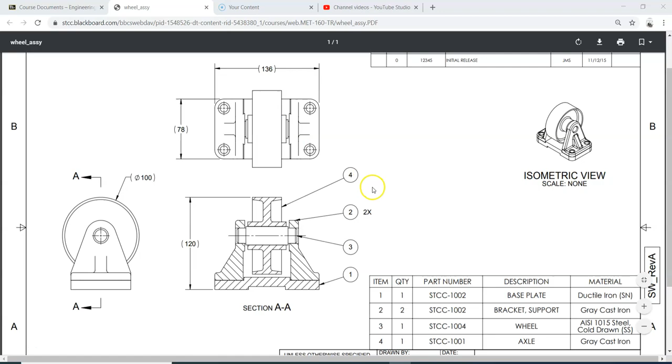First things first, we open up our SolidWorks. There are a few different ways to start an assembly, so I'm going to show you a few now. I'm going to go File, New, to make sure I'm using our templates, and I'm going to be using the assembly.

Just a side note, if you don't have our templates on your computer, those are available on Blackboard with a video underneath it on how to put those into your computer and how to tell SolidWorks where those are.

Okay, so back at this. I'm going to go into STCC metric assembly. And it will... let me delete that. I'll start a new one.

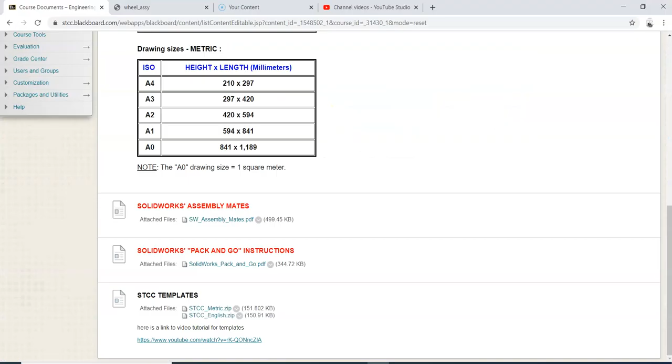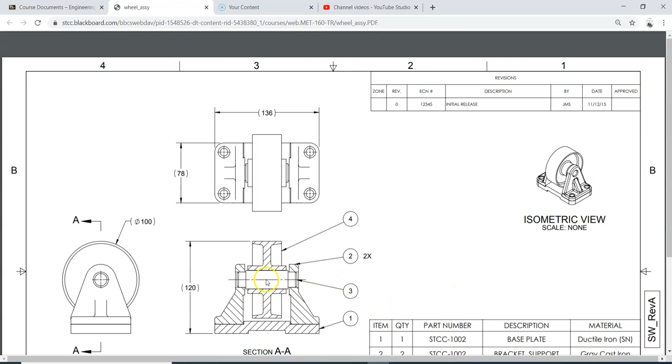First I have to decide what I want to start with. If you look at what we got, I like to model my assemblies on how I would build this, put this together in real life. Obviously you're going to have that base plate down first, and then you're going to have to bolt these in there, put that wheel in there, and slide that axle. Actually, no, our axle has those edges, so we'd have to put one in, and so on and so forth. Then the axle, then the other side, in the wheel.

So let's get back into it. I'm going to start with my base plate. I'm going to open that. Big thing here is if we click, watch what happens. So I clicked. Now look at our origin — it's out in space somewhere weird.

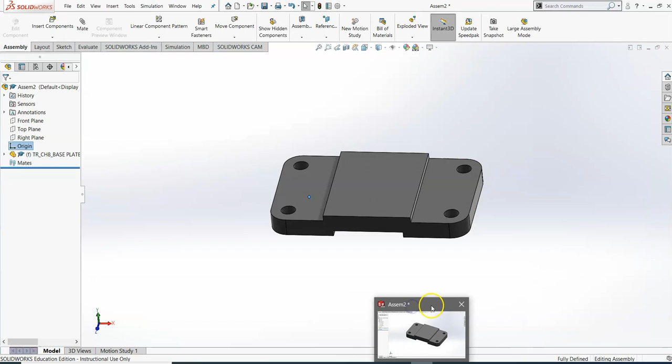So do not click when you first start your assembly. Don't save. We want to go File, New, again, assembly.

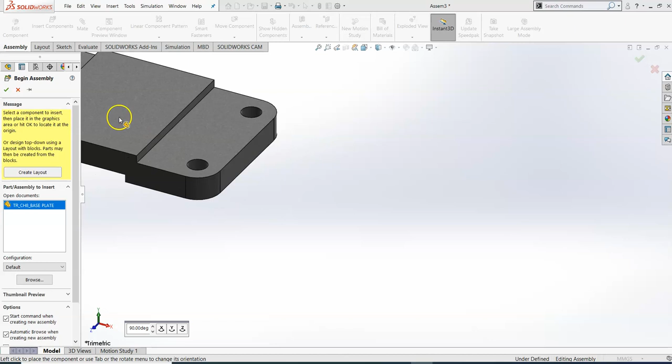Insert my components. If it doesn't automatically come up, just hit browse. Then go to our first model we want to start with, which is our base plate. Select open — so don't click, you want to just go over here and hit check. So what this does is it aligns your model's origin with the assembly's origin, and that's what we want.

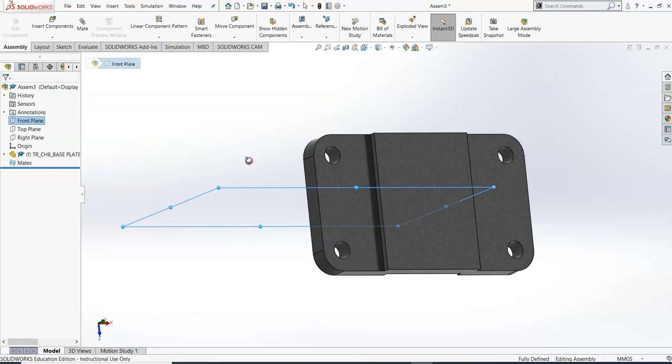Notice I'm fully defined here. This is locked in, I can't move that. My front plane is there, my top plane is my top, my right plane is my right. That's the main reason you want it — you want to bring in your origin with that.

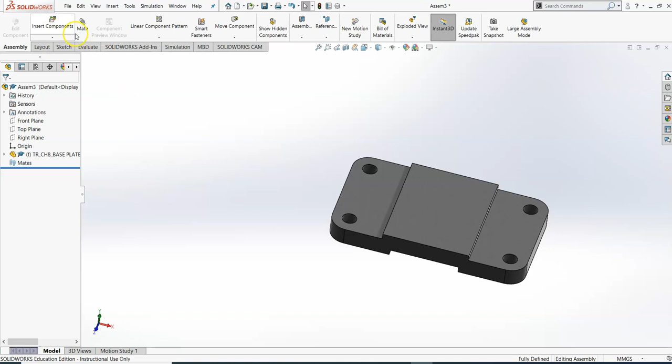So now we need to insert components. That's up here to the left — insert components. It usually pops up; if it doesn't, just hit browse. This is why it's really important to keep your files of those models all in the same folder.

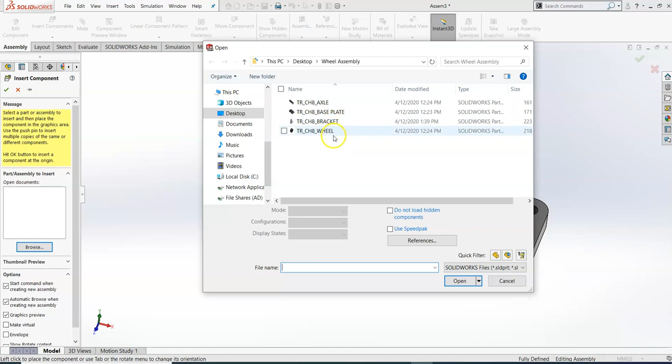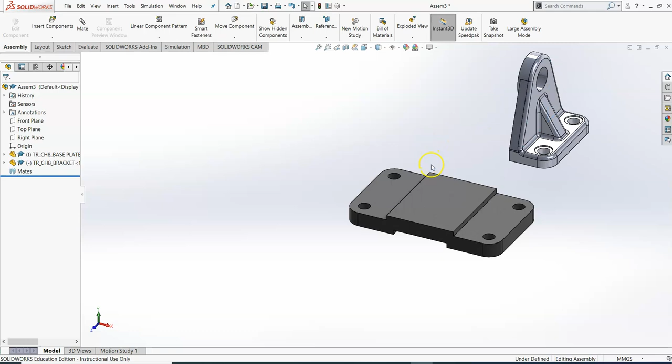Next I'd like to put in the bracket, and you can kind of just place that anywhere. Notice you can put it inside — SolidWorks doesn't really care where you do what you do with that, but notice I can move that anywhere I want.

Now we need to confine this. It's just like when we're sketching — we sketch something, we need to define where it is, right? So that is called a mate. Mate selections right here — this is what we want to mate.

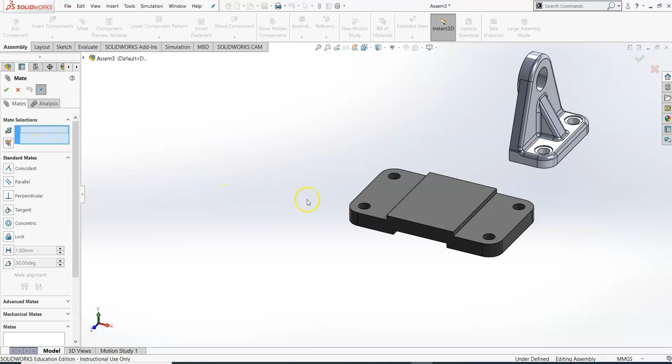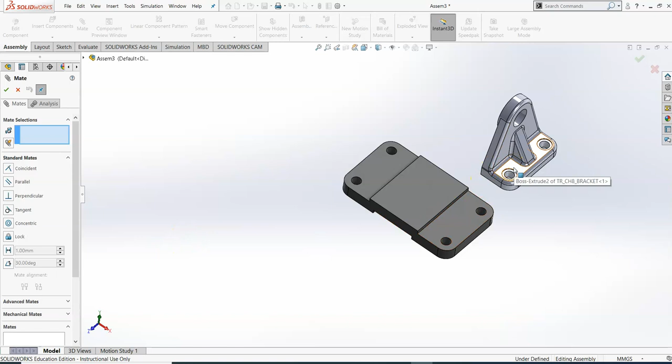If I look at my part, I know that these two holes have to be concentric, meaning circle inside a circle, not off to the side — they're both centered on each other. So I can select this, you can even select this to the bore, to that.

Okay, notice now, I can move it up and down. I can turn it side to side.

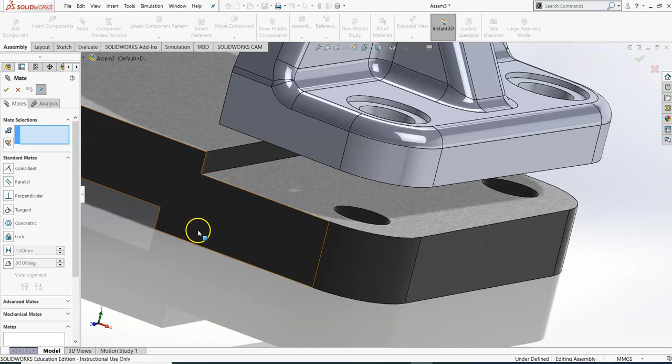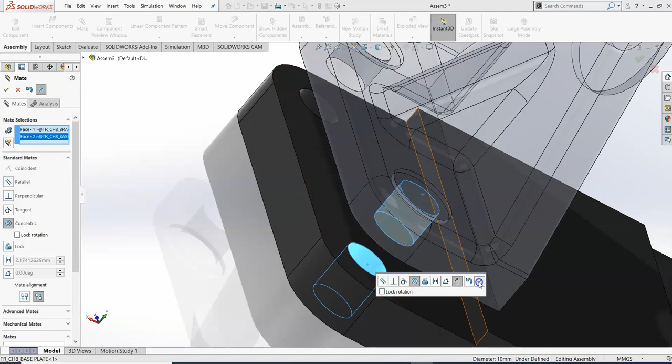Okay, so I need to add more mates. Notice I'm under defined too. It tells you that down here, just like in a sketch when you're sketching models. So if I do that hole to that hole, now I can't move that side to side. I can only move that up and down.

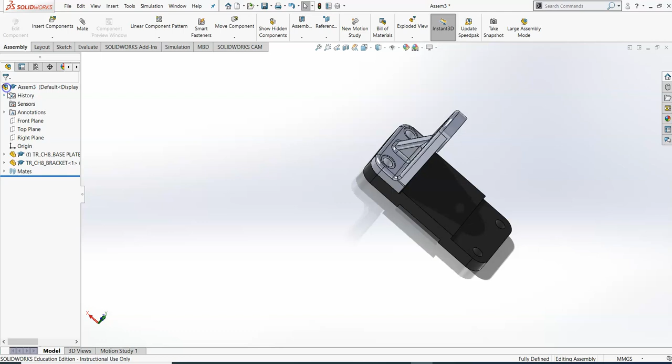So next, something that looks good would probably be this surface to this surface, and that's going to make those coincident. Now I hit OK. Notice what happened, I became fully defined. So if I get out of here, now I can't move this at all, right? You can't move it, nothing.

All right, so next I pretty much want to do that same thing over here. So again, insert components, grab another bracket, and just place that anywhere. You can click here once it's there, right? Notice I placed it, I can still turn it any way I want, up and down, side to side.

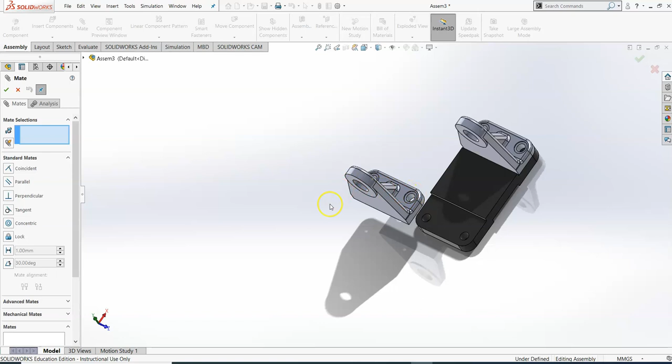So let's just mate that the same way we just mated that one. So we got, but notice now I got to turn this, right? So I don't want this hole with that hole. I want this hole with this one, right?

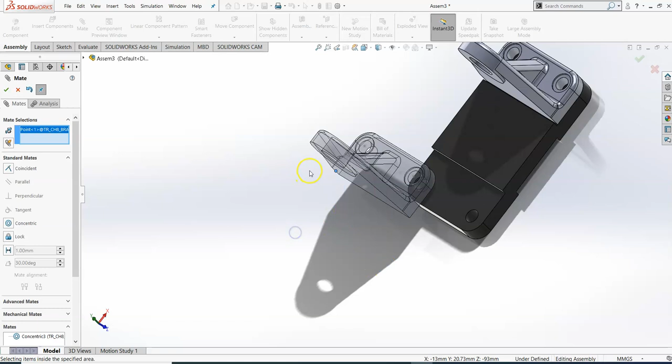Notice you don't want to click lock rotation. I still want to be able to move that how I want.

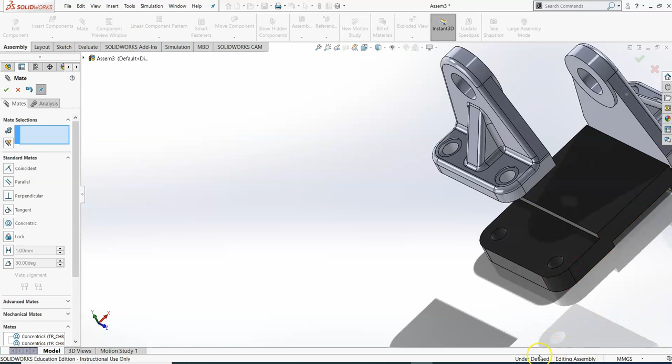So again, that hole and that one, and accept that. I'm still under defined. I gotta stop it from moving up and down. So now I can make that surface and that surface coincident, accept that, and bam, I'm fully defined.

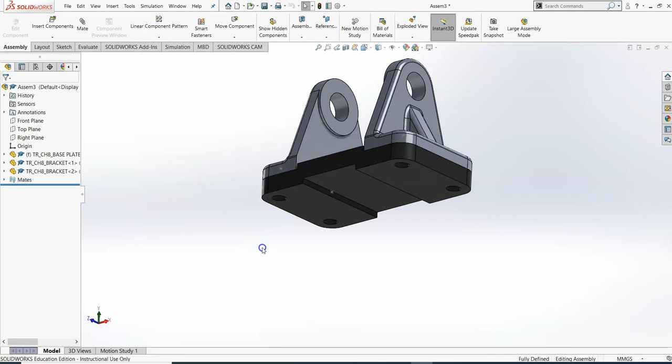So again, you can look at that isometrically, gives you a good view.

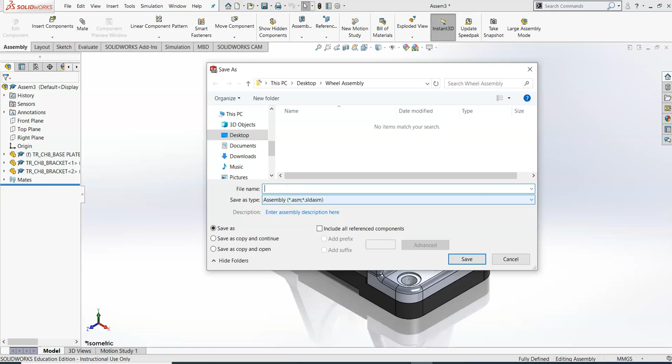Okay, so another thing I want to do is I want to save my work. I don't want to get too far ahead and lose all my work. So just file, save as, desktop wheel assembly. I can just name this wheel assembly, and of course, like always, put your initials with that.

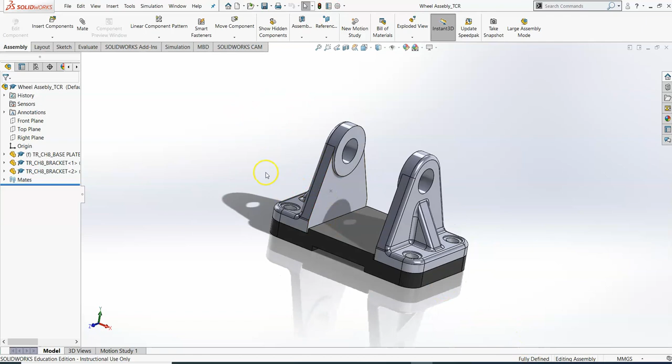All right, so again, fully defined. So let's add another component. So I have my axle, let's try putting that in there.

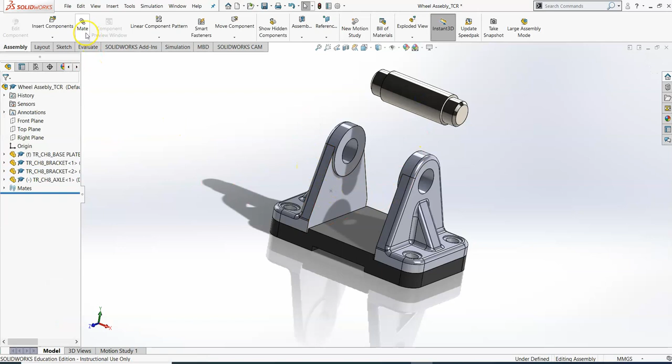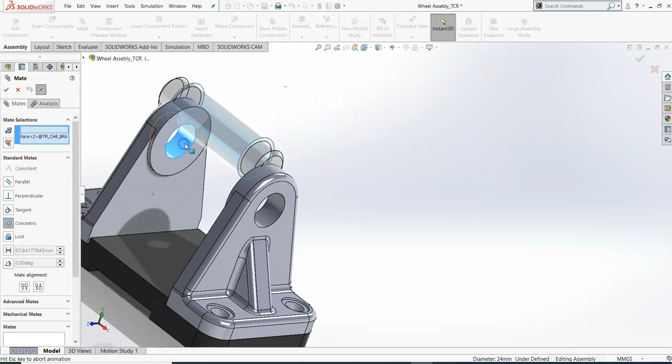And you can just place that anywhere really. So again, mates. So I need this, that surface. Really I could use any of those, because those are all concentric to each other. And you probably make it concentric there, right? So, all right, you can slide it in.

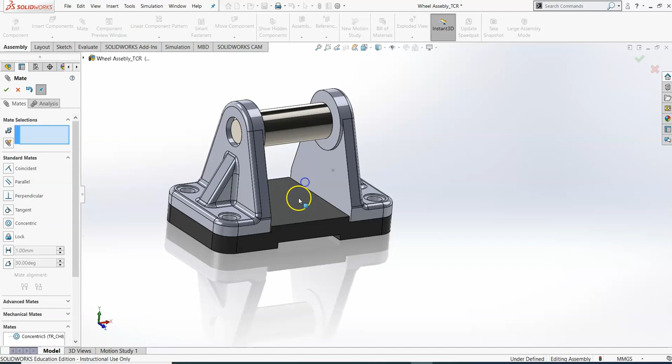If you look, you have clearance all around, right? So I can, you have all these different mates.

You have standard mates, these are much like your actual drawings when you're modeling. And you have advanced mates down here, width, symmetric. And lastly, you have your mechanical mates. We're not going to be getting too much into all of that, mostly just your standard mates.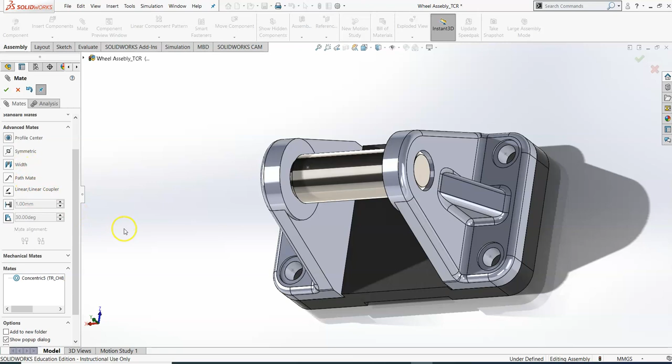Maybe some advanced ones here. So notice how this would be put together. This would really be locked in, right? So I wouldn't be able to just go through there, right? You just put it in like that, right? And it'd be able to move freely.

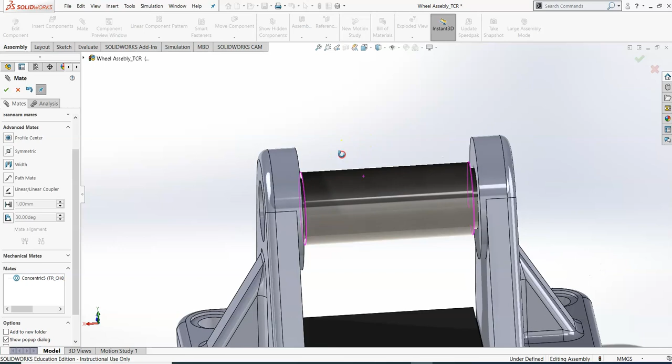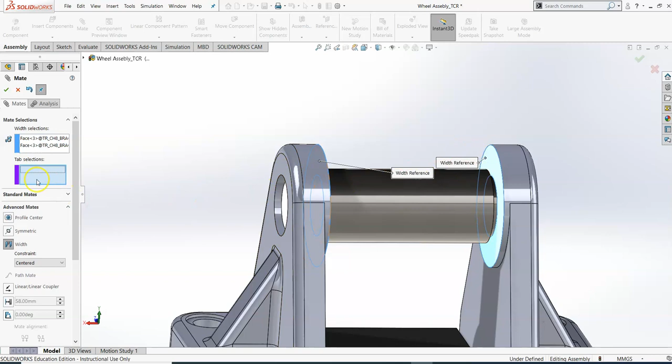I can put in a width if I would like, centered maybe. So let's do our selections. So we have this one and that one, and then we want, so we have our two surfaces there, then our tab selections. I don't know if that one will work. Really I want that face and that face.

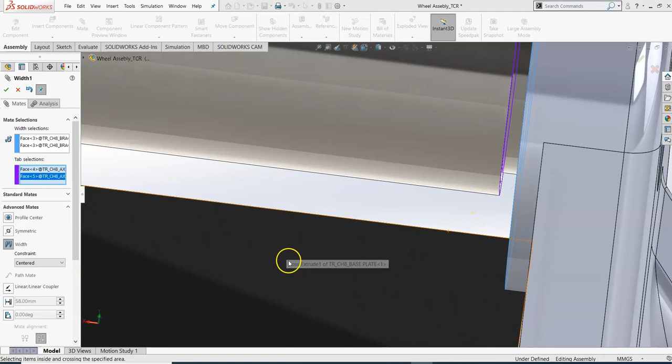So notice now it's, I have it locked in there, but that's just for my reference. So notice I can still spin it. You can kind of see it spinning if you look real good. That is why it's underdefined.

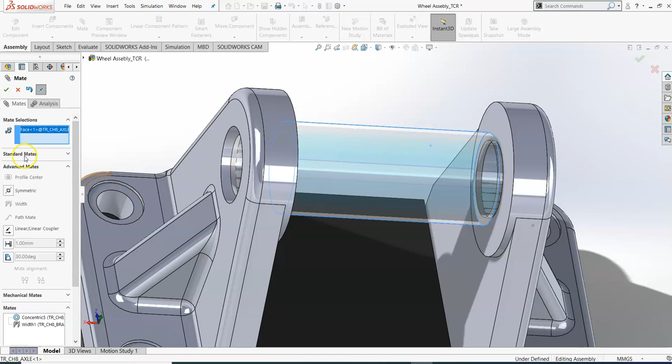So if I wanted to, I could go in there and I could lock my rotation and that would fully define me. So let's just do that.

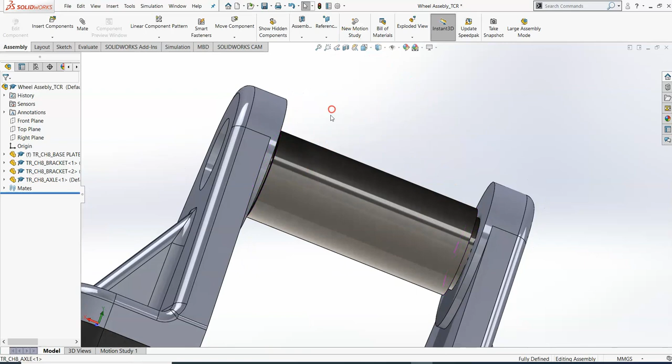And again, so I'm fully defined. Okay, I don't want to mess that up. I'm going to do a Control S to save my part.

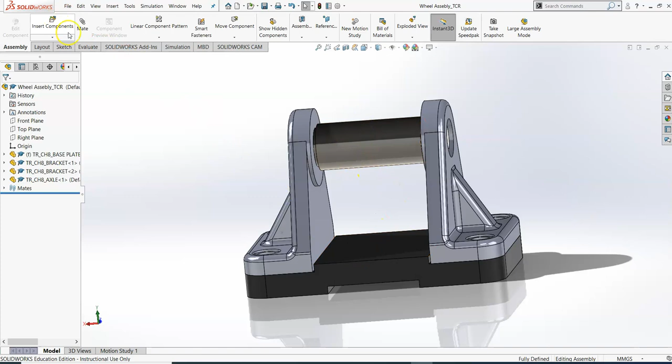Next, we need to add that wheel, right? So we need to insert the component first. So we have our wheel. We can just place that up there. And now our mates.

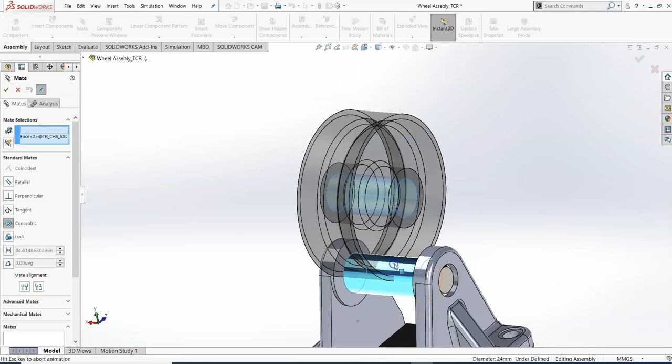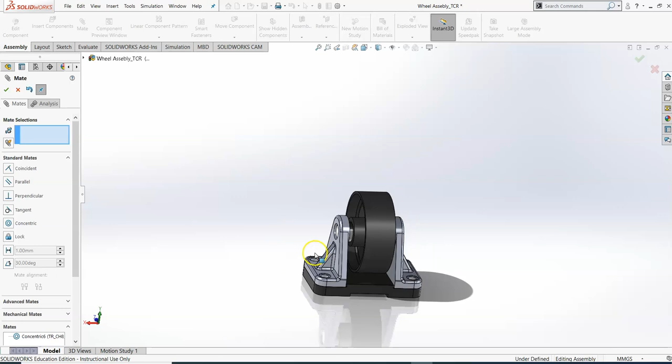We have that center and that, right? So we want those concentric, right? Notice that can still spin. In real life, if you were doing any analysis on these, simulations, you wouldn't really want to lock that down. But this way we have a good drawing.

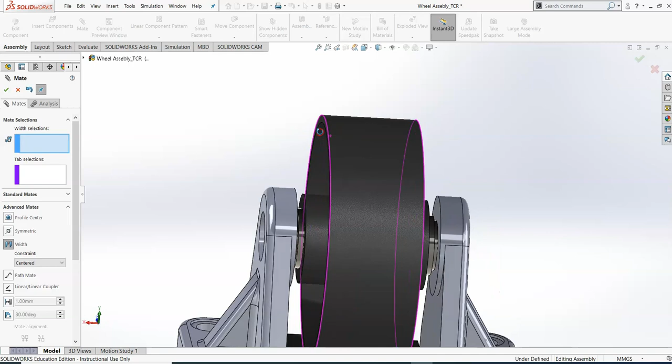I'm going to do another advanced mate there, and I'm going to do a width mate. Remember you have two selections here. Again, you want this one, that surface, and that surface. Your tab selections. Any two surfaces that are symmetrical on this, you could really use this part and this. Usually I like to do the closest two.

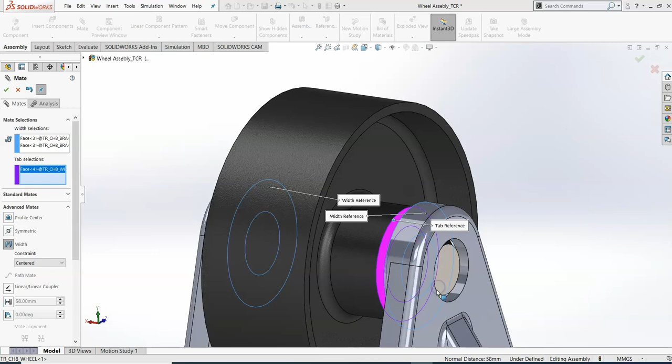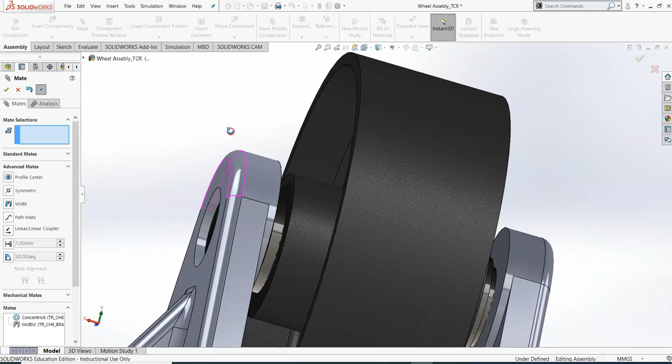Okay, now I have that locked in. So if you see, I'm under defined. That's because this wheel is left to be able to spin. For our drawing, it doesn't really matter. It's a revolved feature, so it's the same all around. But if you want to, you can go into your concentric mate and lock that rotation, hit accept, and now I'm fully defined again, right?

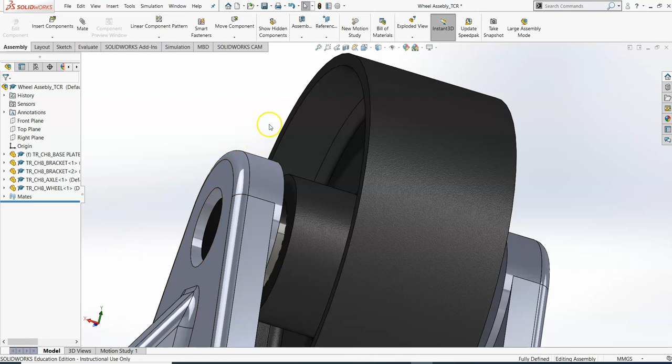So let me just pause this real quick. I gotta go and check something real quick. All right, sorry about that. I'm back. Okay.

Also, notice I do not have my bolts in there like I would in real life, right? I can add those. I will not be requiring that.

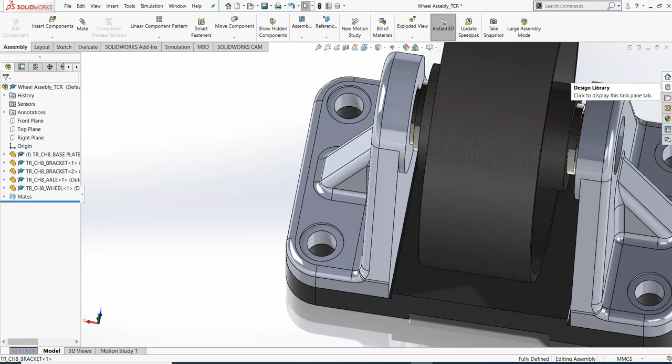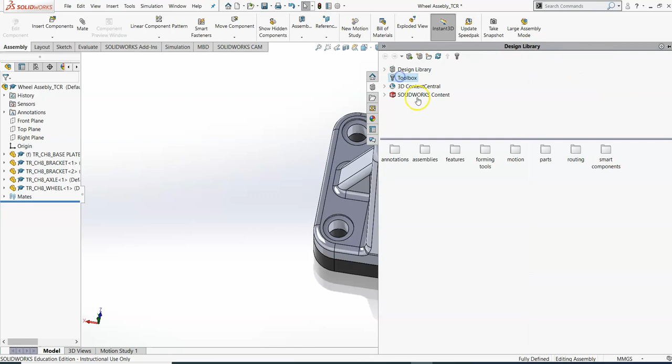Okay, so to do that, where is our toolbox? There it is. So you would go into toolbox. It's not even added in, so you can add that in. It'll download it from the internet. And then you have all these different ones, bolts and screws and O-rings and bearings and pretty much anything you could think of.

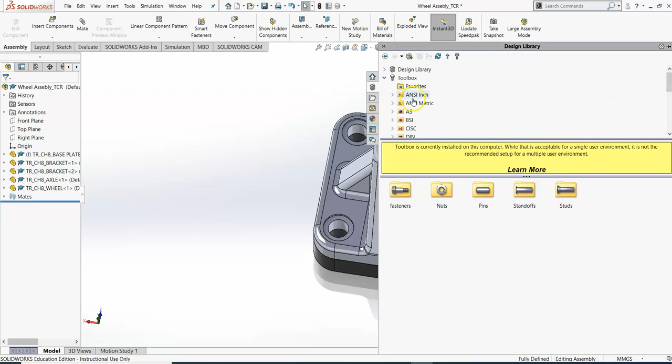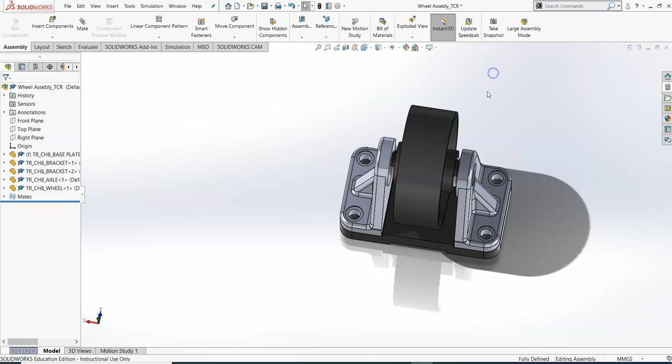A lot of your PEM nuts. You guys don't really probably know about PEM nuts, very commonly used in industry, but we're not making you do that for SolidWorks 1. You will have to get into that later on, but for now I'm just showing you where it is. So again, design library, toolbox, you'll probably have to download it, and you have all these different ones: ANSI inch, metric, I think that's Australian, British standard, Canadian, all these things. You can also make your own library and have it here, depending on what industry you are in, that comes in handy.

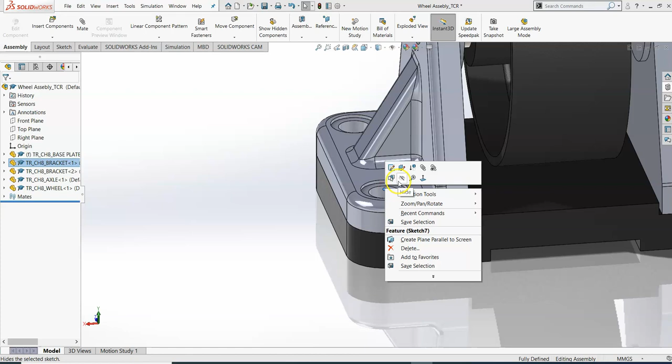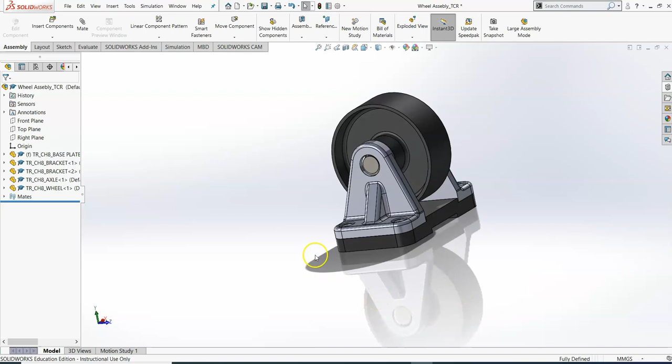But all right, so once you're in assembly mode, I have some stuff I really don't want seen, so I can hide those. I don't want that in my assembly model, my part. But that's your basic on how to make an assembly. Looks pretty cool.

So make sure you save that. See how there's a star up here too? That's how you know you're not saved. So if you Control S, okay, see how I changed that? Now I have to save them both.